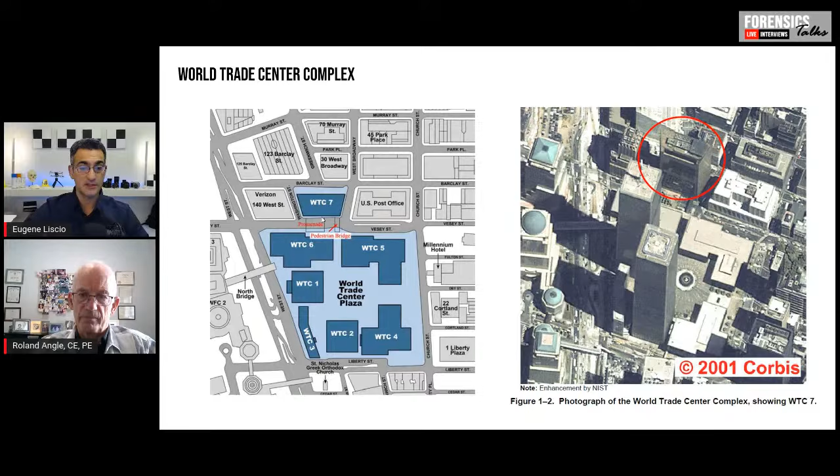It was completed in 1987. It's a steel structure with reinforced concrete construction, built above a Consolidated Edison electrical power substation, with its first 3 floors connected to the substation. When they built the substation, they had planned to build on top of it, so it's a pretty hefty structure on the 4th and 5th floors, from the 7th to the 47th.

Eugene, just a second—the substation only involves the first 2 floors, maybe 1, 2, and 3, but the structure above, they built some heavy additional steel structure there, I guess. That's correct, it goes up to the 5th floor. That's what I meant. But thank you.

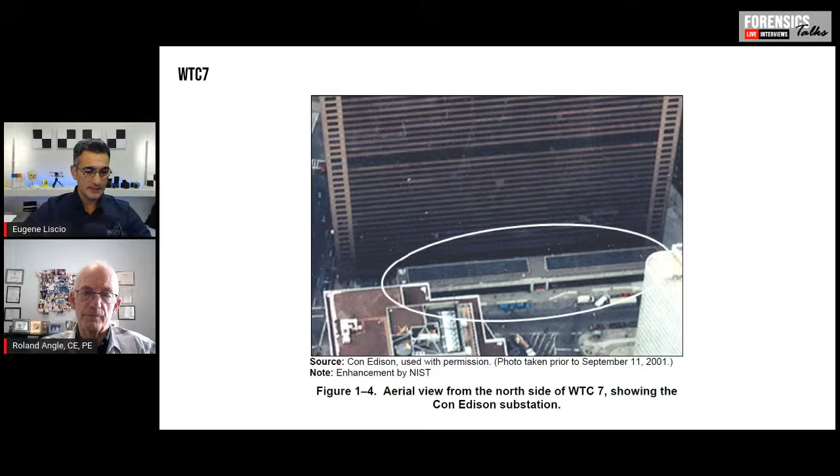So basically that's the building. If we get into the dimensions, you can see in a plan view that it's a trapezoidal structure. The south end here is about 247 feet, and the top end a little bit larger, 329 feet, it looks like.

So it's not a symmetrical building. Fair enough, but one of the things we can look at is that from the 7th floor to the 47th floor, it's supported by 24 interior columns and about 58 perimeter columns. And so we're going to be getting into the columns and such like that.

Now, interestingly, part of the design of this structure included sprayed fire resistant material, so there was a coating of this stuff on there. It's in the design plan, and it appears it was in the bids for the contractors. And in fact, there's an ASTM E119 standard that people have to adhere to, and the instructions to the bidders — this is coming right from the NIST report.

You can read this right in there. The instructions for the bidders for the World Trade Center job were to bid on a 3-hour rating and a 2-hour rating, and that goes for the columns and the metal deck floor respectively. Normally the ratings are a little bit less than that — like a 2-hour and 1.5 rating — so they had to exceed that, and that's all important.

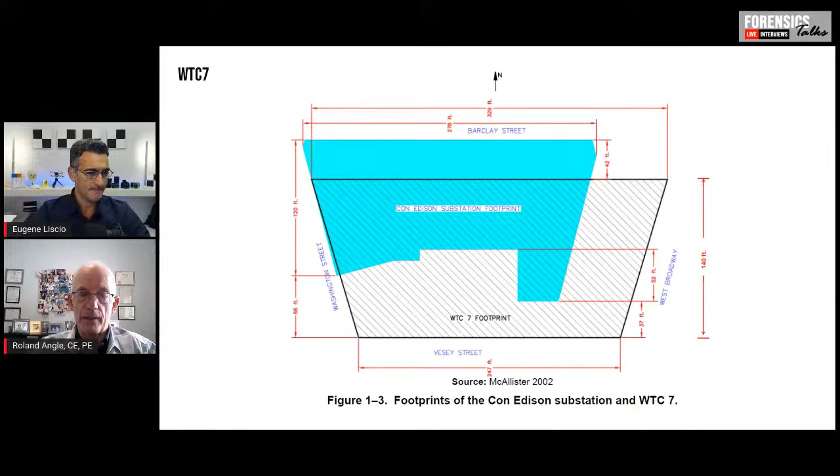I think I'll pause there for a moment. So Roland, let me ask you, if I'm missing something, or if there's something else you think is important to mention at this point, just chime in here. But is that a fair assessment of the building? Yeah, I believe so. Okay, good.

Now, with respect to the actual structure, or on the layout here, let's move into what the events of that day were, sort of the timeline. That particular day started like any normal day. It was actually a sunny day, clear sky and everything.

At 8:46, American Airlines Flight 11 crashes into the North Tower, that's World Trade Center 1. At 9:03, Flight 175 crashes into the South Tower — it crashes into the South Tower, which is World Trade Center 2.

At 9:59, almost 10 a.m., the South Tower collapses, that's World Trade Center 2. Then at 10:28, the North Tower collapses — World Trade Center 1 goes.

With respect to World Trade Center 7, it's damaged by debris from the North Tower. We were talking about 350 feet away, and in the NIST report, it says debris ignites fires on multiple floors of the building. It talks about 7 exterior columns being severed, and these fires ensue and grow.

They're uncontrolled. There's a sprinkler system in the building, but it's not working. It's not clear to me if it's because somebody was running a test or if it's because of something with the water main, which is tied in with World Trade Center 1 and 2. I don't know, Roland, do you have anything to add to that?

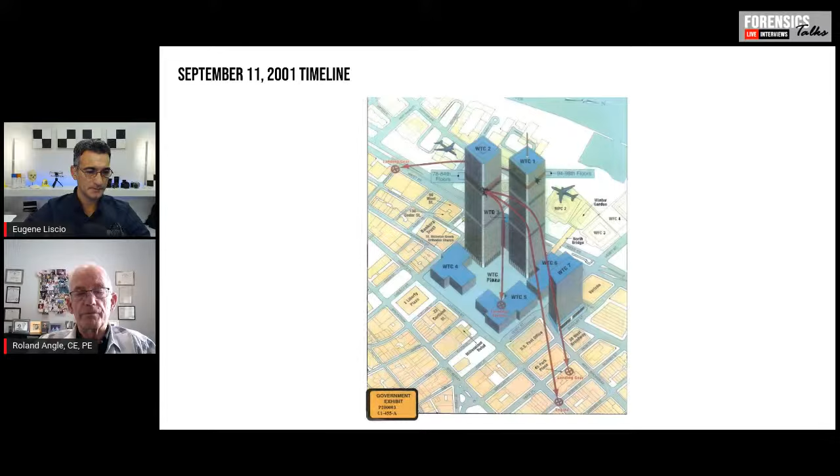The NIST report says that the sprinkler system for floors 21 and below was turned off early that morning for a test — so it was shut off. But the upper floors, above floor 22, were served by tanks in the upper part of the building. So the upper part of the building had sprinklers and water functioning, and the lower part did not.

There was a mid-level from floor 21 through floor 39 with 2 large storage tanks, and there's some additional stuff happening between the 40th and 47th floor. So for whatever reason, they're saying the fires just burned uncontrolled and the sprinklers didn't work. So that's what we have.

Now, in order to really understand the contention between what NIST is saying and what Dr. Hulsey is saying — in summary, NIST is saying that the damage done to World Trade Center 7 was caused by, they quote, 'flaming debris' coming from World Trade Center 1, and that it induced electrical failures. So there were fires on the southwest side of the building.

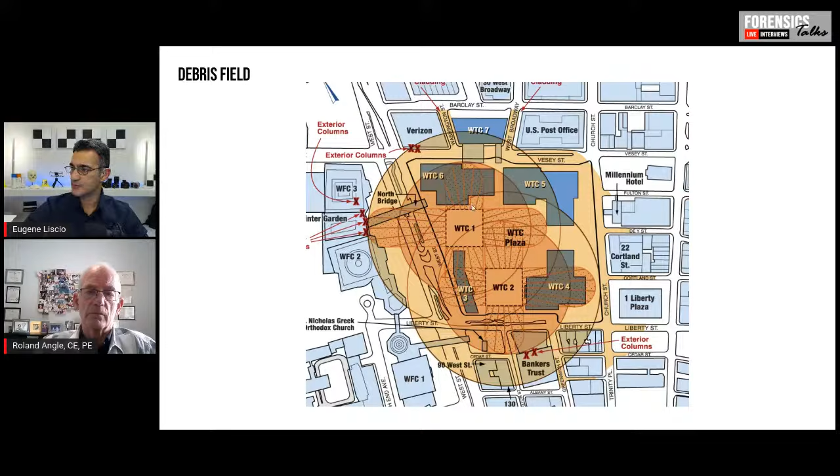If we look here, this is World Trade Center 1, this is World Trade Center 7. So obviously the debris flying from here is going to hit the south face of World Trade Center 7. The diagram I have here shows — and this area in red in particular — is where I believe the damage to the exterior columns occurred.

So 6 of these things were damaged here. I don't know exactly where, but they highlight this particular area and some other areas of damage. Based on that, that's where things start on its own with World Trade Center 7.

Roland, what I want to talk about is the fires, because that's really at the basis of everything here. Is there anything in particular about the fires? You've probably seen some of the videos and read the reports, but is there anything about this building or about the fires

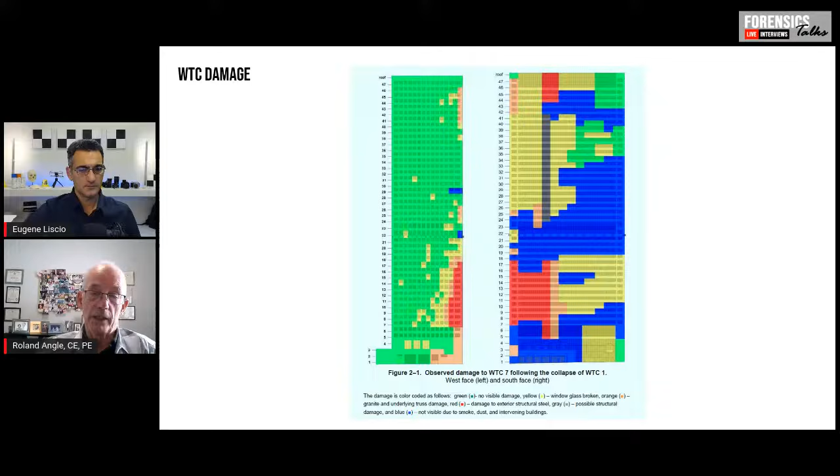that could have led to this global collapse? That is NIST's contention, that it was the fires and the fires alone that caused the building to collapse. They said that this damage was not a factor, and that the fires started by the debris resulted in office fires that traveled around the building from their initiation point in the southwest corner to the northeast corner, where they caused thermal expansion of what turned out to be the longest beams in the building. That expansion caused a girder to be pushed off its connection at one of the columns, which led to a collapse of floors. That was supposed to happen on the 13th floor, and that led to a collapse on the floors below it in that corner of the building, which led to instability of the column, causing it to buckle and the adjacent core columns to buckle, then the rest of the core columns to buckle. Then the instability and collapse of all the core columns caused the perimeter columns to buckle, and that's what brought the building down. So that's their theory.

Right, so it's a theory worthy of investigation, certainly. I think this is an important point, because when I first heard fires brought this thing down, it's easy to think it burned up, like it was consumed in fire and just fell to pieces. But in fact what they're suggesting is that it was not an extreme temperature, just that the temperature was sufficient to cause thermal expansion.

And it's this thermal expansion, just the fact of the heating, that causes a problem. Some of the things I'd like to ask you about are the temperatures used in the analysis. Normal office fires, what kind of temperatures should you expect, and were those types of temperatures used, or was there a temperature that was more aggressive or more conservative used? Do you recall what that was?

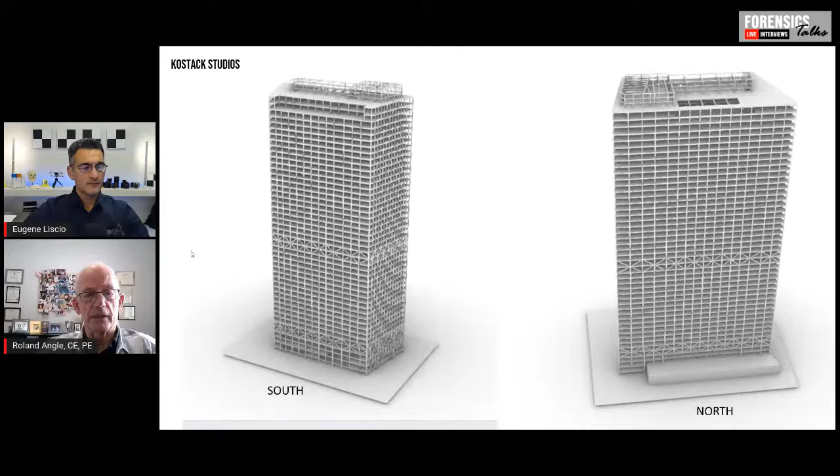The temperatures they used in their analysis to show their theory was viable were 600 degrees Celsius for the beams that expanded, and 550 degrees for the girder.

Now if you look at your diagram, we're looking at the 5 beams that frame into the girder that runs into column 79. Look at column 44, and then column 79 - there's a girder that runs between 44 and 79. Then there are 5 beams that frame into it from the east side, going over to the east perimeter of the building. The beam that frames in right above column 79 is the longest beam in the building. The girder runs north to south, and the beam runs east to west, framing in just above column 79.

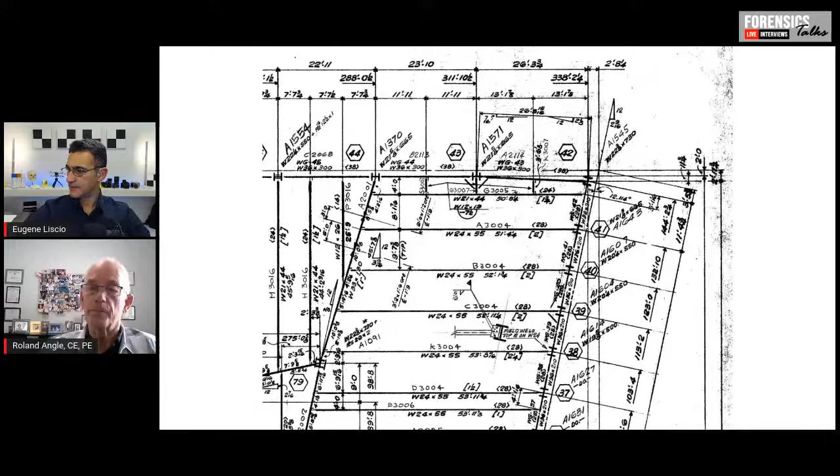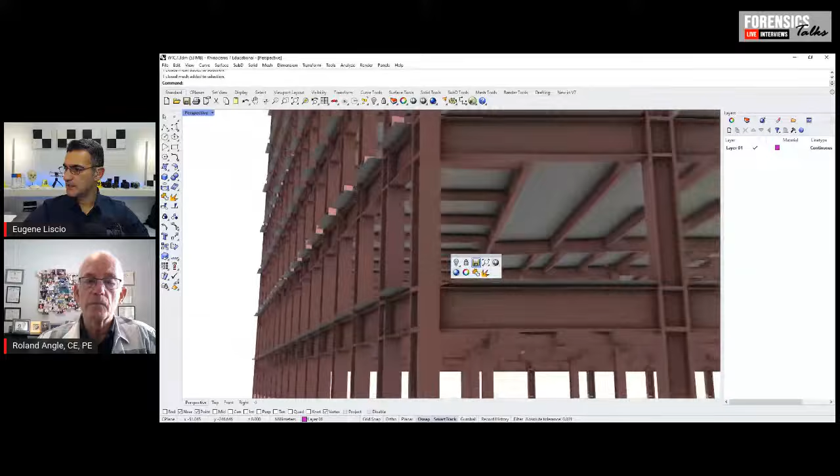Yeah, east to west. And that one there, I've got some drawings for it - we have Professor Hulsey's model for it, and this is an important point. Let me bring up something else, because I have a model that may help frame things for people. I'm going to bring up the model I showed before - I'm not sure if you can see this, but I think you can. This is just a 3D model of the structure of World Trade Center 7, for demonstrative purposes - not all the connections are modeled properly, but just for people's benefit as we get into it. Let me go from the top down here. You'll see this is the south end because it's the shorter end, and this is the north end.

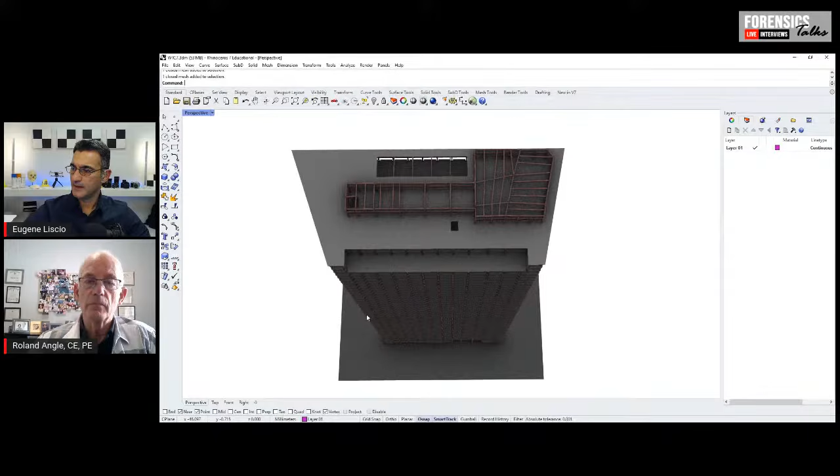So we're talking about column 79, which is actually in the northeast corner. If I wrap around this side, and as we get into these upper floors, floor 13, I believe, is the one that was in question. So as I move in here and we start looking at the columns, let me see here. Oh, I'm too high, I believe.

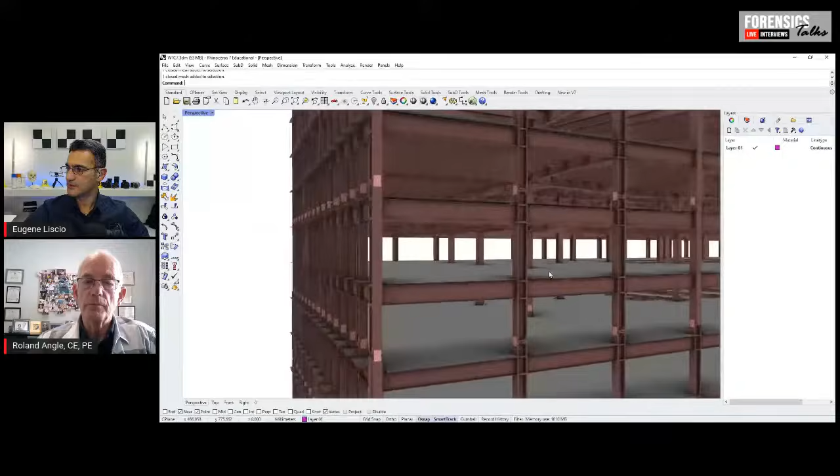You'll see that there's a column here, and it has some connections. Let me just look at it here. You see that this is one of the main beams here. That's a girder, girder A2001, which is the girder in question. And then there's all these other beams here that go into 2001.

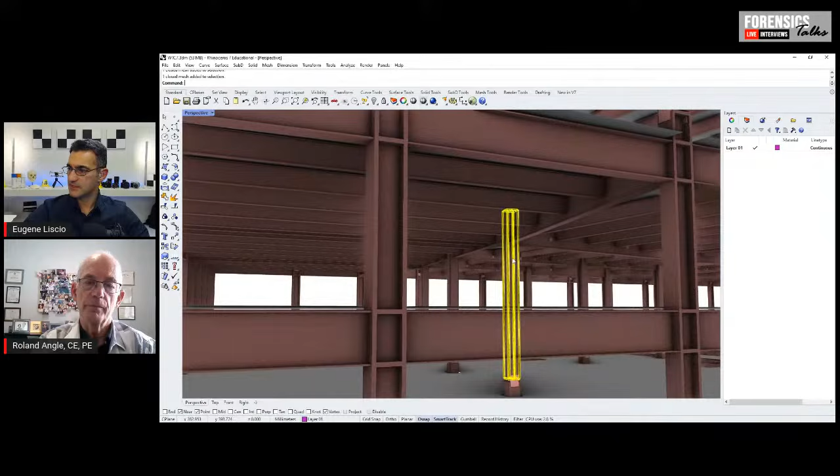Okay, so basically this is column 79. For everybody that's watching, this is the main column that is assumed to be buckling in the NIST report. And the issue with the thermal expansion, if I understand it correctly, is that this girder A2001, as it heats up, you have these beams, and it gets pushed off to the right here. Is that fair to say?

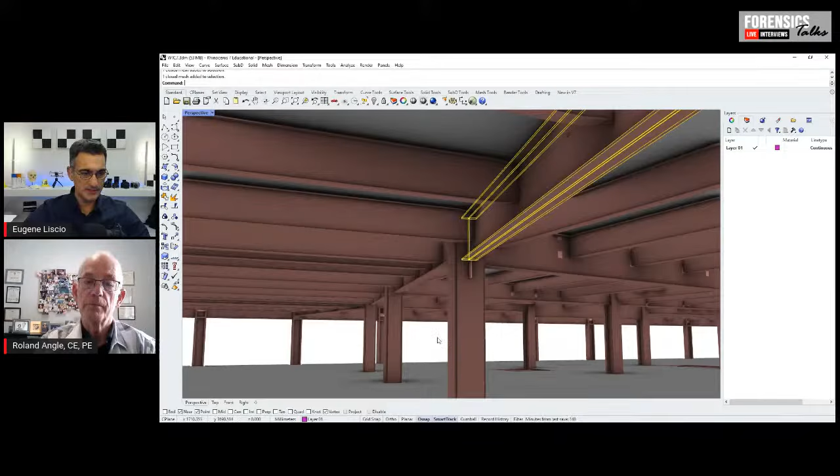Yes, that's their analysis. Their analysis is that those 5 beams coming in from the left there, heated to 600 degrees centigrade, expanded, and all the expansion in their analysis went to the west. In other words, all the theoretical expansion of those beams pushed the girder to the west.

And that's actually a very important point, because Professor Hulsey analyzed that system under thermal load and said, in fact, the east wall of the building would not be fixed. The floors would expand in every direction from a center somewhere near the elevators. And therefore, all of that expansion of the beams could not be attributed to the direction that NIST claimed it would be. And therefore, the girder couldn't be pushed far enough to be pushed off of its seat. So that's a major aspect of the differences between the two reports.

Right. Is the east wall of the building fixed, and does it force all the expansion of those beams to the left, or does the east wall of the building expand as well and therefore decrease the amount that the girder could be pushed?

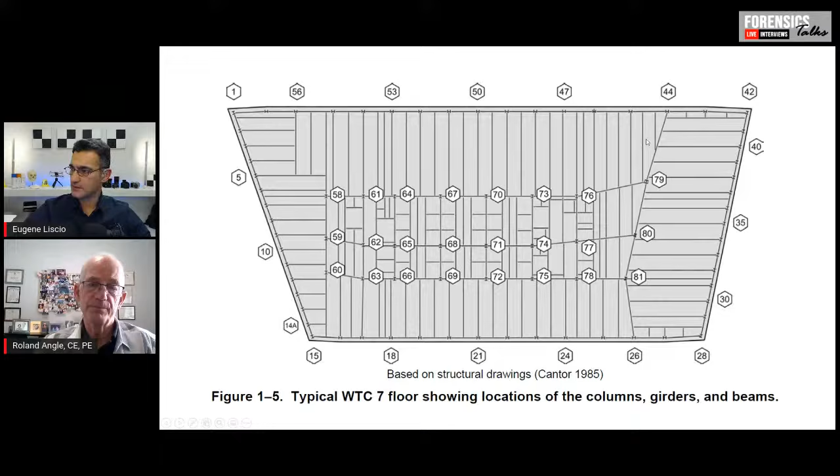Okay, and you talked about the thermal expansion. So basically, just for people's benefit, if you're looking at this model or this image of the top-down view with all the columns and everything, you can see that these core columns in the center are here. But basically, if this heats up, what Dr. Hulsey said was that the center area somewhere around all these elevator shafts is the part that's going to stay most stationary. And as everything heats up, it's going to expand outwards towards the exterior of the building.

And one of the things that was brought up here, I think it's on this last slide here, maybe. Dr. Hulsey, this is the northeast corner in the bottom here, but this area that's surrounded here, they didn't, my understanding is that they didn't model this properly, the exterior. So can you explain what happened there?

NIST didn't model the entire floor. They're talking about a progressive collapse in their analysis. So let's talk about progressive collapse.

What that means is that they're saying the beams expanded, pushed the girder off the seat, the floors collapsed, the column was left unsupported for 9 floors. It was too slender. It buckled. That caused the adjacent columns on the east side of the building and the core to buckle. The buckling of those 3 columns in turn led to the buckling of the remainder of the core columns, traveling from east to west. And then the collapse of those core columns, the 24 columns in the center, caused the exterior columns to collapse, and that led to the global collapse. Now, that's what's called a progressive collapse. In other words, one thing led to another, led to another, led to another. It's a domino effect. So that's their theory, that this progressive collapse led eventually to the global collapse of the building.

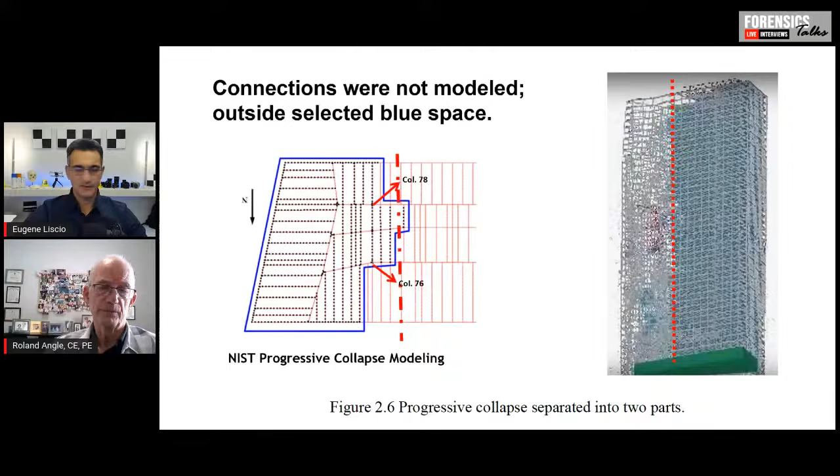Okay, interesting. And I think it's important to note also there's an issue around the design of the column and the girder, right? The A2001 girder, and where they meet and their connection.

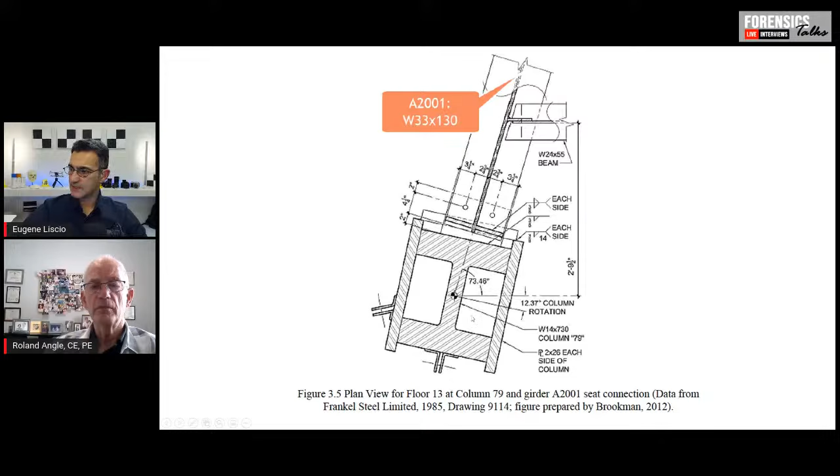So for people's benefit, if you're looking at a top-down view here, this would be column 79 in the center, and this girder would be girder A2001. The northeast corner would be to the top right of the screen here, relatively. One thing that's important is that column 79 has these protruding sections on the sides, and that's important because I believe there are some design issues.

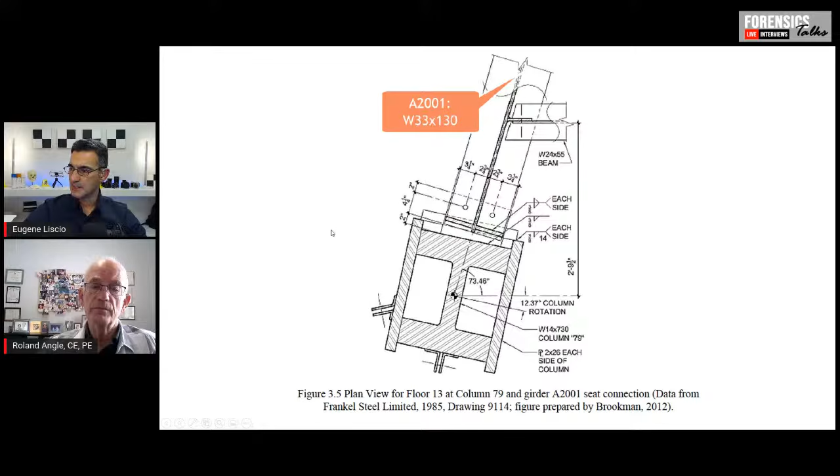Let me go to another view. This is from Dr. Hulsey's report. Can you comment on the design, what Dr. Hulsey modeled in his report versus what NIST modeled or used in their report with respect to the connection of column 79 and A2001?

Yes, the plates on the side that are welded to that column protruded past the edge of the column member by about 1.75 to 1.8 inches, I think was the exact measurement. So when the girder is heated to 550 degrees centigrade, as indicated in this model, that girder would also expand, and that would push it up against the face of column 79 and column 44 on the other end.

So even though there was space there in the construction when the whole assembly was put together, the expansion of the girder under the effect of the temperatures would push it up against the face. And if the girder was being pushed to the west, according to NIST, the edge of the girder flanges would be caught behind the side plates on the column, so the girder could not be pushed far enough to escape the seat below it, and it couldn't fall. So that was a problem. Apparently, in the NIST analysis, they left the side plates off.

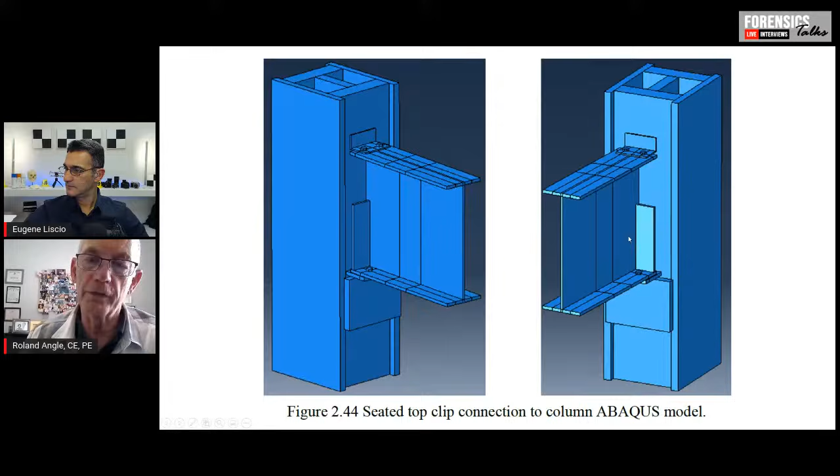Now, what you're focusing on there is stiffener plates, and the stiffener plates were another issue. There were stiffener plates welded to both sides of the girder where it connected to the column, and those stiffener plates would have stiffened both the web, which is the vertical part of the girder, and the lower flange, which is the horizontal portion of the girder, because it was welded to both the horizontal flange and the vertical web. So when NIST did their analysis, they left that stiffener off.

And they said that by leaving off the stiffener and by leaving off the side plates on the column and by pushing the girder all the way to the west, those three factors were what enabled them to claim that the girder was pushed off of its seat. But in fact, none of those things are possible.

First, because the east wall of the building is flexible and the beams wouldn't have pushed the girder as far as they said. Secondly, because the side plates on the column were in fact there, and the heating of the girder would have trapped it behind the side plates. And thirdly, because the stiffener plates were there, and their existence would have stiffened the lower flange of the girder so it wouldn't have curled up and allowed the girder to fail.

So there are three reasons why their model does not conform to what we know to be the facts. At least the existence of the side plates and the stiffener plates was a fact, and we know that from photographs and construction documents. NIST even admitted that they left off the stiffener plates at the girder, but they claimed that wouldn't affect the behavior of the girder in its travel off of its seat. We know that's not true from basic mechanics of materials.

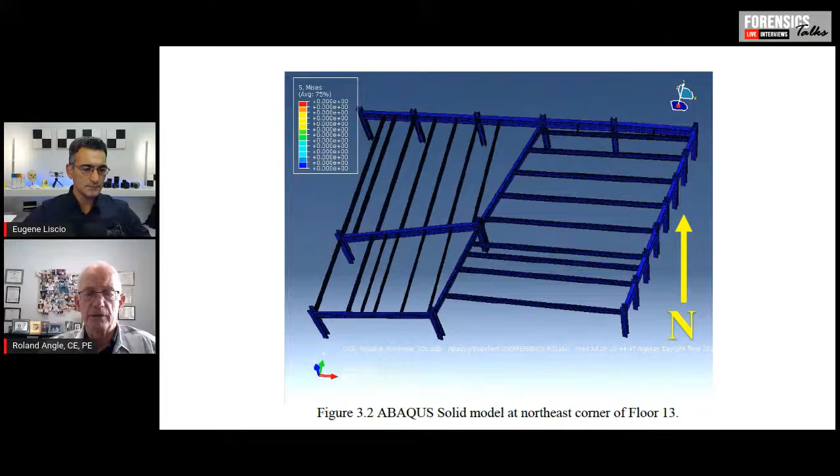Right, let me ask you - so let's assume, and I believe both NIST and Dr. Hulsey consider the case where A2001 here falls off of column 79. I believe this is on floor 13, and basically, let's say it falls off and the floor collapses. Am I correct in saying that's what they believe happened, that the floor collapses? That's what NIST proposed, that once the girder was pushed off of its seat, it fell, and the entire northeast portion of the floor on the 13th floor collapsed down and hit the 12th floor below.

Okay, so what discrepancies do we have between what Dr. Hulsey is saying versus what NIST is saying with respect to the collapse of the floor and how that was modeled and the kinds of forces that are there? Is there sufficient force for the floor - I mean, it's concrete and steel, so is that enough to break through the floor underneath and several floors underneath it?

Well, that's the next question that he addressed. He said, 'All right, let's assume that somehow the girder did come off of its seat. I don't think it possibly could have, but let's take it from there and see what happens.' So he allowed the girder to fall, and then we looked at what was the impact of the 13th floor hitting the 12th floor below.

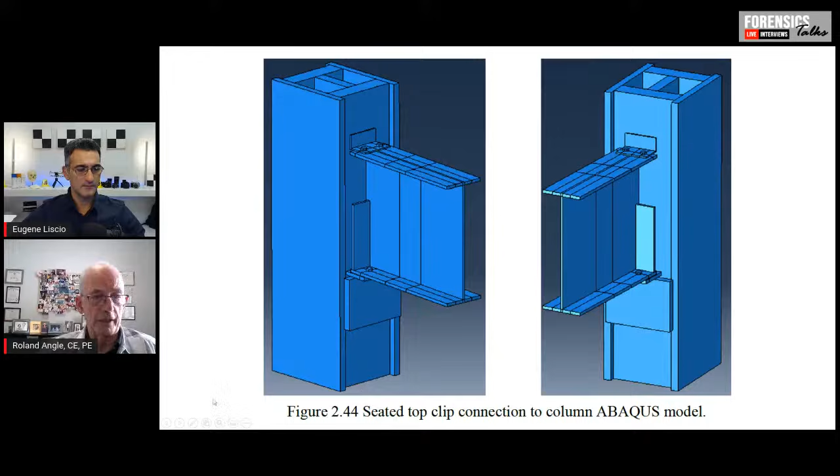I don't think their analysis holds up. In fact, Hulsey went on and said, okay, let's take the next step. Let's let column 79 buckle and see what happens then. He tried to follow this all the way through to the end. What he found was that even if you buckle column 79, if you go back to the floor plan, now let's see the layout of the columns. If we allow column 79 to buckle between the 13th floor and the 5th floor, that in turn would bring down column 80 and then column 81.

And then, according to this model, the buckling of those three columns spreads from east to west throughout the core. 76, 77, and 78 go down. 73, 74, and 75 go down. 70, 71, and 72 go down. And so on across the core of the building from east to west.

And so that analysis, when Hulsey followed it, what he found was that after 76, 77, and 78 go down, then the rest of the exterior columns, 35, 30, 28, 26 in the southeast corner of the building around there, would be overloaded and they would buckle. And then the building would collapse, but it would fall over to the southeast.

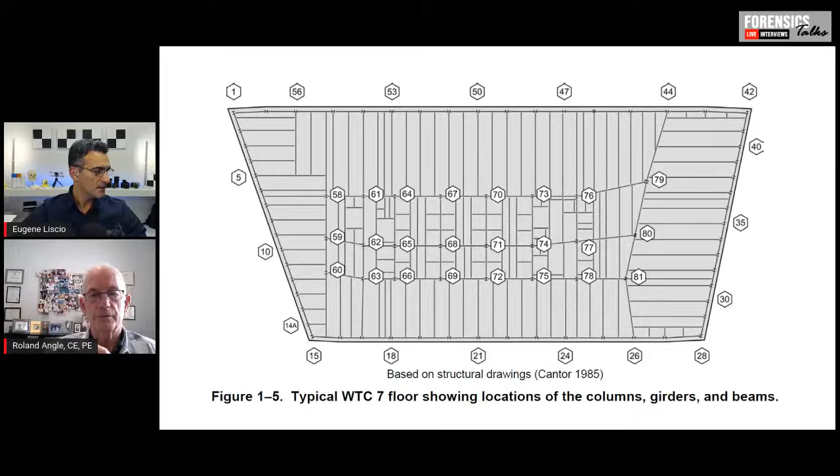So let's talk about free fall for a second. And what's the importance of free fall? When NIST issued their preliminary report on this building failure, I think it was August of 2008, there was one of the researchers working with us at that time, David Chandler, who was a physics teacher, had analyzed the collapse, and he wanted to see how fast it was falling.